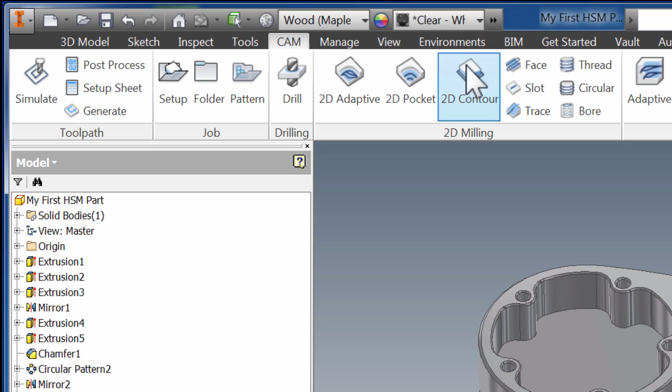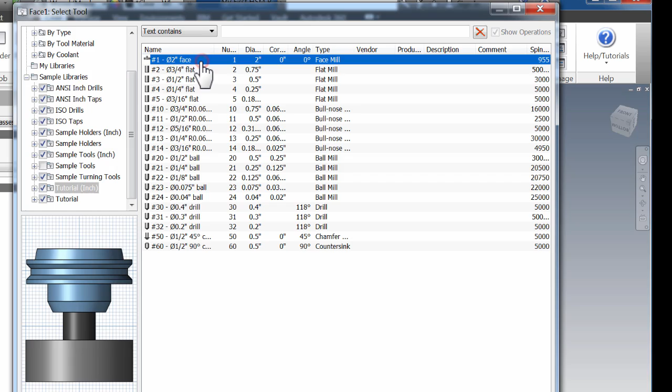So we'll click Face. The first thing we need to do is select a tool that we want to use. So click the Tool button. We can browse to our sample libraries and find the Tutorial Inch library. Within the Tutorial Inch library, we're going to select our 2-inch face mill and click Select. With our face mill selected, we simply need to right-click and select OK. Very quickly, we've produced a facing operation across the top of our part.

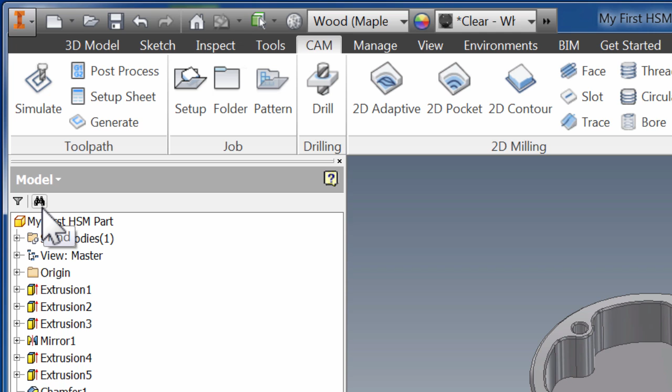But you'll also notice that we moved from the model browser, where we captured a history of how we modeled the part, to the CAM browser, where we begin to capture a history of how we're going to machine the part. On this CAM browser, the first item is a setup. A setup is used anytime we're going to fixture the part in the machine. If we need to fixture the part multiple times to machine multiple sides of the part, you'd have multiple setups.

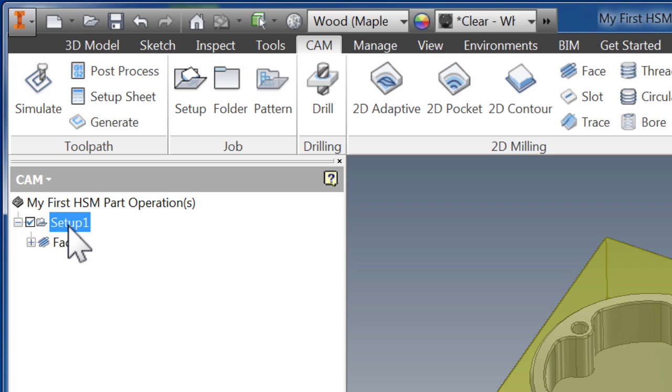Now, setups can be created automatically as they were in the case of this facing operation, or you can create a new setup by clicking the setup icon. Let's go ahead and double-click the setup to edit this setup and just take a look at what's captured within a setup. On the first tab of our setup properties, we have the model definition. This captures what model we're machining. In this case, the single part we have. But in the case of an assembly with a vise and the component you want to machine, we'd select just the component that we wanted to machine.

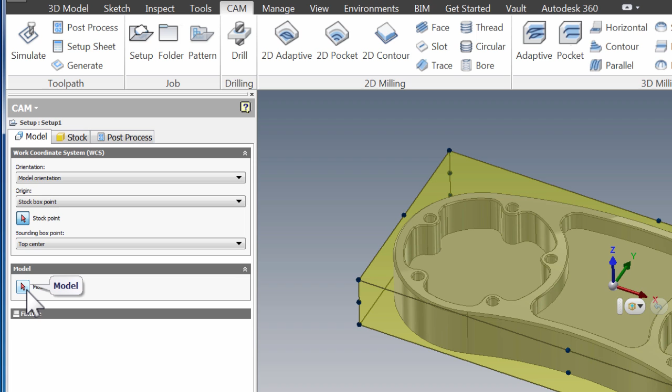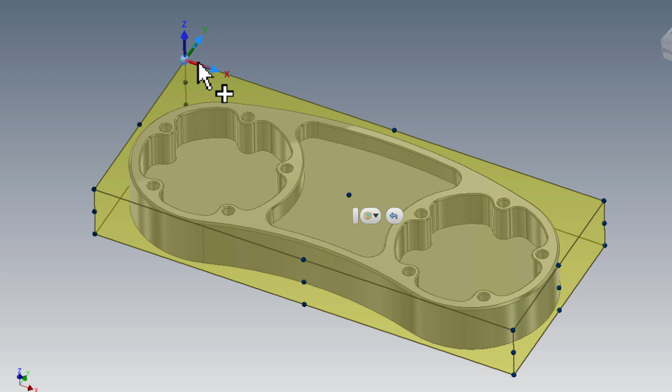We're also defining where our work coordinate system is. We can do this from the properties or visually. I could simply select the node of my work coordinate system and then select a point to move the work coordinate system to that point. I can also select the tip of any one of these arrows to invert the axis. So I've inverted the x-axis, and I just inverted the y-axis. The last thing you should know about the triad is if you click the stem of it and then select a face, that axis will then be perpendicular to the face you've selected.

I'm going to go ahead and get the z-axis pointing up again, because remember the z-axis should point at the spindle of our machine. So let's select the stem of that z-axis and select a face we want to have the tool pointing down at.

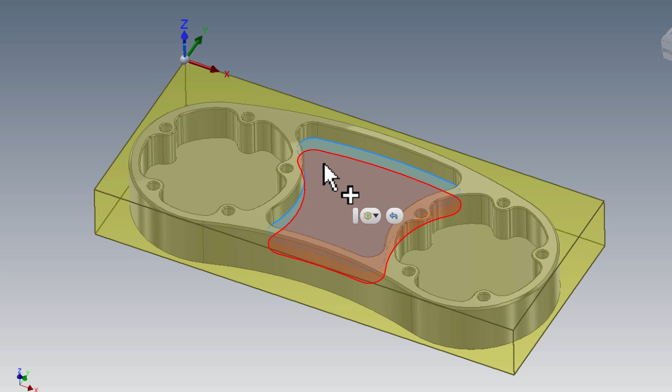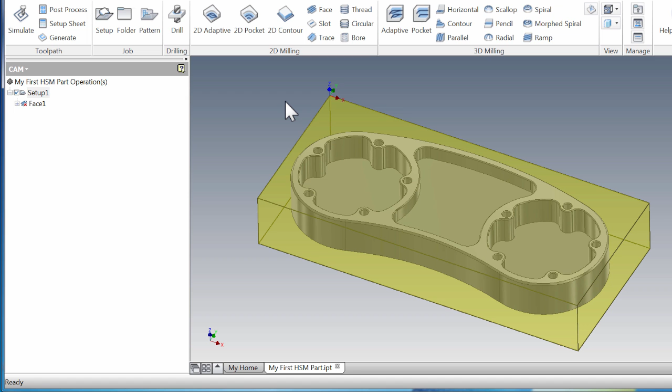The final tab controls information for post-processing, but we're going to leave that to the last video where we talk about formatting the code for your specific machine. So at this point, we can go ahead and right-click and say OK to update the stock. Now, anytime we make a change to the stock or any model change in Inventor, our toolpaths need to regenerate. Inventor HSM is going to indicate this by placing a small red X on the toolpath. We'll simply click Generate, and the toolpath will automatically update based on the new stock, or in the case of a model change, based on the new model geometry.

So we've quickly learned how to access the CAM tools from within Inventor HSM. We understand what a setup is, and we can see how the operations begin to form underneath a setup.

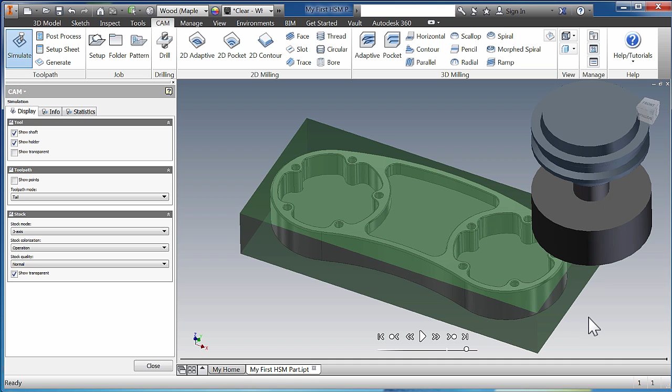Before we move on to the next video where we'll add the remaining operations, let's go ahead and hit Simulate so we can visualize what this toolpath is going to look like. My current settings have the toolpath set to view only the tail of the toolpath, and I'm showing my stock as transparent. I'll click Play, maybe speed the simulation up a little bit so we can visualize the stock being removed off of our part. I can right-click to close out of the simulation, and we'll now move on to the next video in our series.